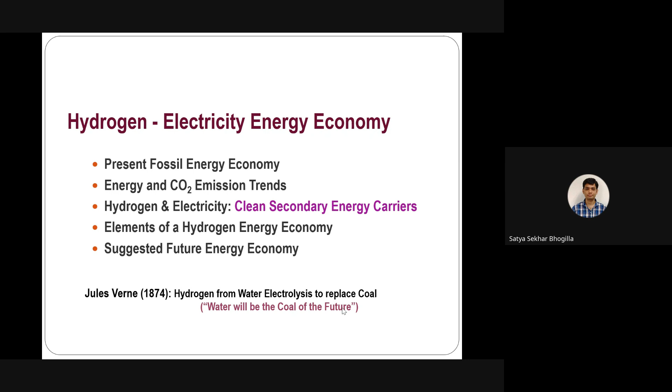As many of you know about global environment challenges - I think the previous speakers also talked about this - regarding climate change, how we want to reduce CO2 emissions. We have global agreements, COP21 and Paris 2015, to keep global warming less than 2 degrees compared to pre-industrial levels. We also have problems with air quality, like currently in Delhi we have too much air quality problem, and we want to regulate NOx emissions and restrict the number of commercial vehicles in future. The third important aspect is renewable energy development and energy security.

In the last 2 years we've seen a lot of geopolitical situations, wars between different countries, and it depends again on energy security. Some countries, because of energy problems, are unable to do what they want in terms of energy. So every country wants to be independent in terms of energy, not wanting to import or depend on other countries for energy consumption and demand. That's why we want to diversify our energy sources and improve renewable energy development in our country.

Based on this, the automotive industry is facing challenges, but it will also have opportunities for new technologies in the automotive sector as well as the power sector. So basically we want to phase out fossil fuels based on two steps: one is phase out of fossil fuel vehicles, then phase out of fossil fuel power plants. These are the two steps we want to follow to reduce CO2 emissions and go for renewable energy development.

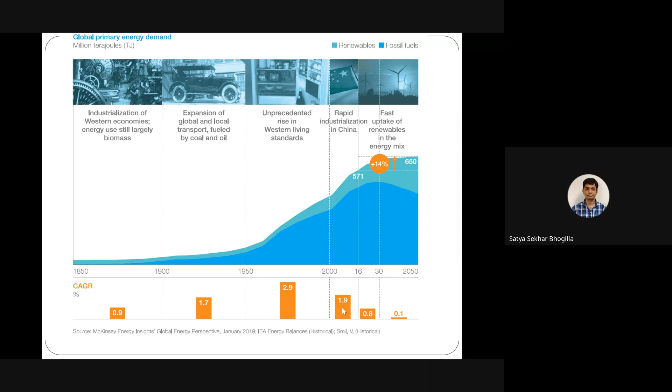We want to increase renewable energy and decrease fossil fuels. If you see, after [20]30, it was predicted that fossil fuel energy consumption will decrease, and that part will be compensated using renewable energy.

So in 2021, Prime Minister Narendra Modi ji said green hydrogen will play a significant role in achieving India's decarbonization goals. He also announced the national ambition to become a global hub for green hydrogen production and export.

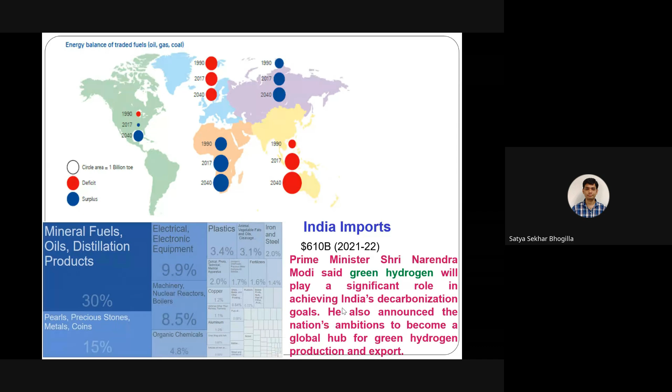So then people ask why green hydrogen is a must for India. As I said, we have energy import reduction goals - we want to reduce energy imports by moving towards renewable energy. We also have plans to increase renewable energy up to 500 gigawatt by 2030; currently we have more than 100 gigawatt. Then we want to become carbon neutral by 2070, and also move to cleaner energy, because we are the third largest CO2 emitter.

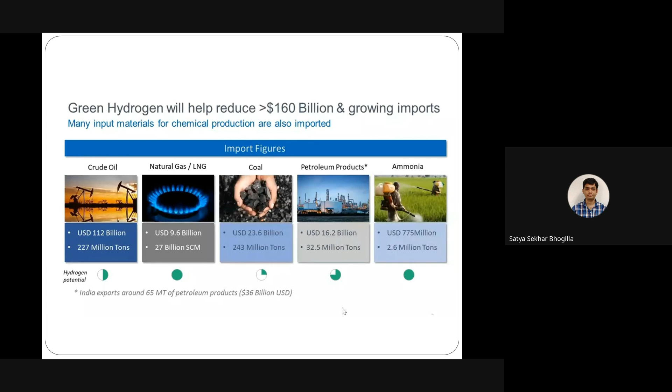Green hydrogen will also help reduce our import bills - you can reduce carbon, crude oil, and natural gas usage, since these are used for different purposes like industry or transportation. If we move from these to hydrogen and produce hydrogen within our country, then we can reduce the import figures. You can see these various figures related to different fuels.

So green hydrogen will help in the twin goals of energy security as well as decarbonization. Only 18% of total energy consumption is in the form of electricity; the remaining 82% is in other forms of energy, like heat. If we want deep decarbonization, we have to reduce that 82% of energy which depends on imported oil, coal, or gas.

If you look at the ratio of carbon atoms to hydrogen atoms, we started with wood, which is about 10 atoms of carbon to 1 atom of hydrogen. Then we moved to coal, 2 atoms of carbon to 1 atom of hydrogen. Then petroleum, 1 atom of carbon to 2 atoms of hydrogen. Now with CNG based IC engines, it's 1 atom of carbon to 4 atoms of hydrogen. If we move to pure hydrogen based transport or cars, we may have 0 atoms of carbon for 2 atoms of hydrogen. This means we are moving to reduce this carbon to hydrogen ratio, aiming to make it zero in the near future.

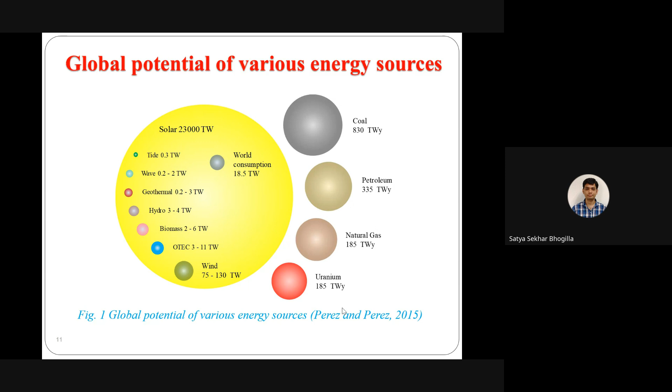This will give a major advantage to reach that 500 gigawatt renewable energy by 2030. We also have offshore wind energy. This price is coming down, but it is still higher than solar photovoltaic.

Then we have another renewable energy source, concentrated solar power. The price is coming down, but it's still 2 to 3 times higher than solar photovoltaic. This is mainly because we don't have large mass production of these components yet. But the technologies are improving. Maybe in the next session I'll talk about concentrated solar power, how to improve the technology and reduce the price in the near future.

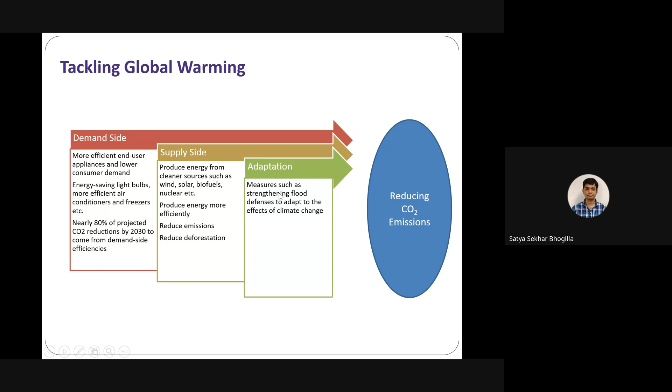So looking at the projected CO2 reduction from various sources and their contribution by 2030: the major chunk is predicted to come from mileage, meaning transportation, reducing CO2 emissions by 35% from the transport side, 13% coming from energy production efficiency, and 30% coming from lighting, ACs, and industrial motors improving efficiencies, allowing us to decrease CO2 emissions by 30%. Then a 10% improvement from large scale nuclear energy.

India has a lot of future plans, so we want to increase this 2-3% of nuclear energy to 10% by 2040 or 2050. Then 12% is coming from renewables and biofuels.

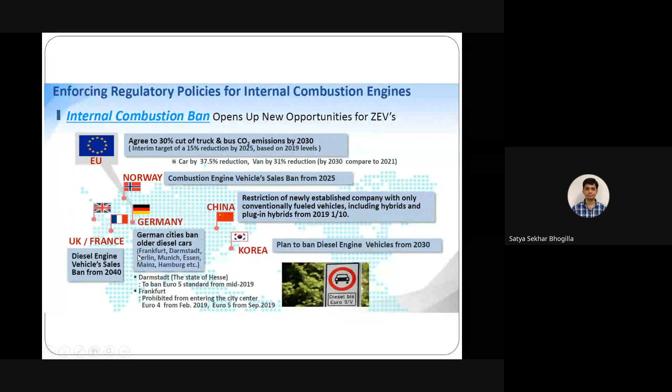Then what is the replacement of oil for the transport sector? That is the major important task. Natural gas is currently being used for some vehicles, but it's still not a long-term solution, because we are importing the natural gas, and there are still some CO2 emissions, though it's better than diesel and petrol. Then we have second generation biofuels. This will impact the food situation, because the same land can be used to produce biofuels instead of food. It also impacts the environment, because if you increase biofuel production you need more land, cutting forests, and using fertilizers and irrigation may also be a problem.

Then we have two other options. One is electrical drives using lithium-ion batteries. The other is hydrogen as a fuel, like non-fossil hydrogen, which will be one of the options. So in the future, you will see two types of vehicles, maybe after 2030: one is electrical drives using batteries, the second is hydrogen as a fuel.

So this is the green car strategy with respect to fuel economy improvement and hybridization. Currently, we are going with combustion engine plus electrification. In the future, only electrification will be there in cars, either working with hydrogen or with electricity based on batteries. So R&D is pushing towards clean mobility with respect to battery vehicles and hydrogen fuel vehicles. Now both types of cars are running on the road. You can see Tata having fuel cell vehicles, and for battery vehicles we have many different companies manufacturing currently.

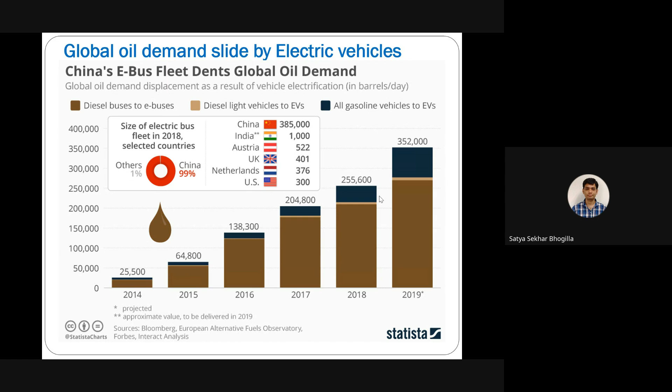Once you move towards electrical based vehicles, your energy demand with respect to fossil fuels is going to decrease. But still our demand will increase with respect to fossil fuels, because the number of vehicles is going to increase for another 10-15 years. So some percentage will come from electric vehicles, meaning the same demand or slope will not continue after maybe 10-15 years. So that will actually give the global oil demand a decrease if you increase electrical vehicles all over the world.

Then, with different technologies available, how do you choose which kind of vehicle to use? As I said, we have battery vehicles, fuel cell vehicles, conventional ICE engines, and also hybrid vehicles combining batteries and ICE engines. Then you have to think about initial cost versus operating cost, comparing ICE engines and battery vehicles.

In some states the electricity cost is very cheap, so in that case even though the cost of an EV is a little higher compared to an ICE engine, if you look long term, like 10-15 years, the total cost of initial cost plus operation cost will be much less for an EV compared to an ICE engine. That depends on your state, the cost of electricity, and related government taxes and regulations. We also have fuel cells and batteries, and combinations like hybrid vehicles.

Then we have to see how we can see the energy storage comparison, because this is important. A vehicle has to run like 1,000 kilometers or 2,000 kilometers, that depends upon your specific storage capacity. But if you compare different types of batteries, like lithium iron battery, we have storage capacity around 150.

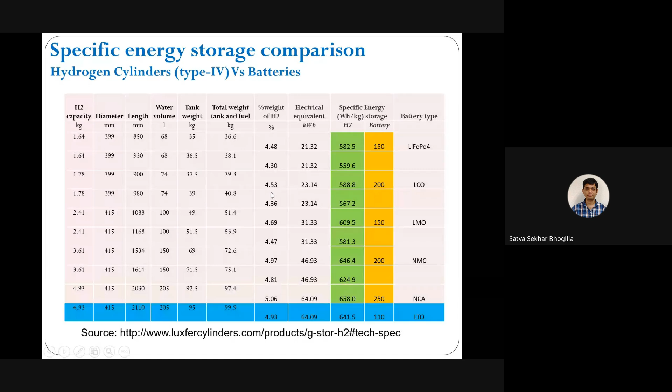If you see the different types of production technologies, like electrolysis of water and electrolysis of carbon dioxide to carbon monoxide, and we have biomass gasification, chlor alkali process, and the reformation of fossil fuels with CO2 sequestration. Then we have coal gasification to produce syngas to produce the hydrogen.

Currently we are using mostly fossil fuels. We are producing hydrogen in India as well as abroad, all over the world. But if you want to go to that green hydrogen, the energy has to come from renewable energy sources, so that we can give the production by using electrolysis of water, which will give the big jump to hydrogen production.

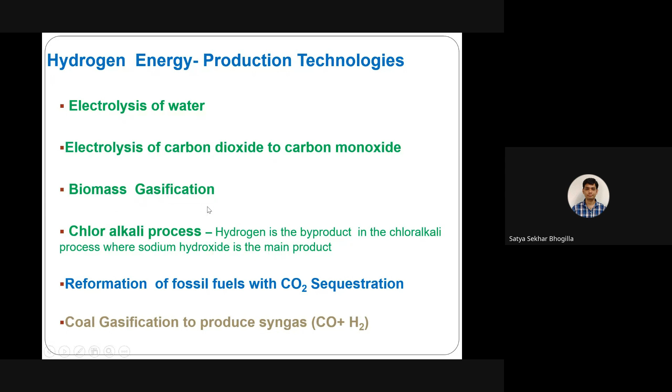At the same time, in India we also have different technologies like biomass gasification, which is also one of the future technologies that can give low pressure hydrogen production.

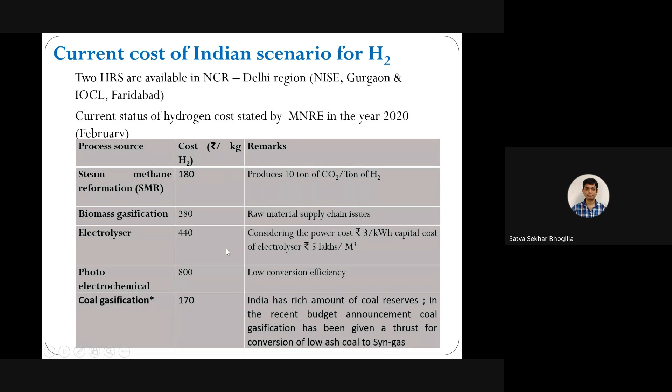Then photoelectrochemical, this is a very high cost because it has very low conversion efficiency. So this will not have future scope to produce hydrogen at low cost. Then coal gasification, the cost is very low, and India has a rich amount of coal reserves, but it will give some kind of CO2 emissions that will hamper our goal to reduce CO2 emissions.

Because we want to become a global green hydrogen hub. Then basically we want to export. If you're able to produce cheap electricity, cheap hydrogen within India by using renewable energy, this will give the driving force. If your production cost is half of this cost, then you're able to transport and export to other countries, not only using it in India. That is the major goal by 2030.

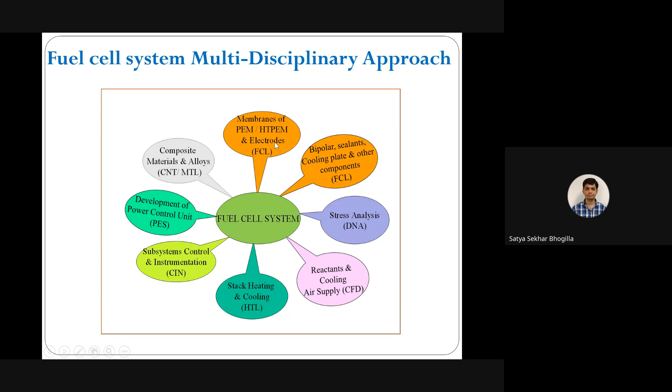We have reactants cooling and air supply, which is also related to engineering. Stress analysis related to bipolar plates and other plates, then design people come into picture. Then membranes related to electrodes - these are chemistry and chemical people and material science people who work on these different aspects of electrode chemistry. So basically what I want to say is it's a very highly multidisciplinary area, where different people can work together to produce a very high efficiency fuel cell system or electrolysis system.

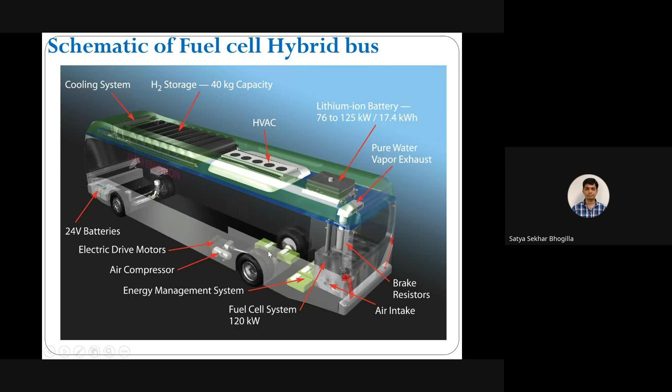Now we may have a doubt: what is the difference between the battery and fuel cell? Basically, both are electrochemical devices. The only difference is that fuel cells need a continuous flow of chemicals, whereas in a battery the chemicals are already stored inside, so they can convert into electricity. Another difference is that the fuel cell will continuously produce electricity as long as you supply the fuel, whereas a battery, if it goes dead, if it's rechargeable, you have to recharge it again, which takes some time. But the fuel cell will continuously supply electricity as long as fuel is supplied. That is the major difference between the battery and fuel cell, since both are electrochemical based devices.

Here you can see how we are converting hydrogen into electricity. Basically, this fuel cell converts the chemical energy from fuel directly into electricity, unlike an IC engine, where you first convert chemical energy into thermal, then mechanical, and mechanical into electricity if you're able to. The fuel cell converts directly from chemical to electricity. Because of this direct conversion, you get very high efficiency compared to an IC engine. There's also very low noise because there are no moving parts, compared to an IC engine. There's stable power generation, so you can continuously produce power from the fuel cell. There's reduced expensive power transmission because you can change the configuration based on your stack, connecting stacks in series or parallel depending on power requirements, and it's less polluting.

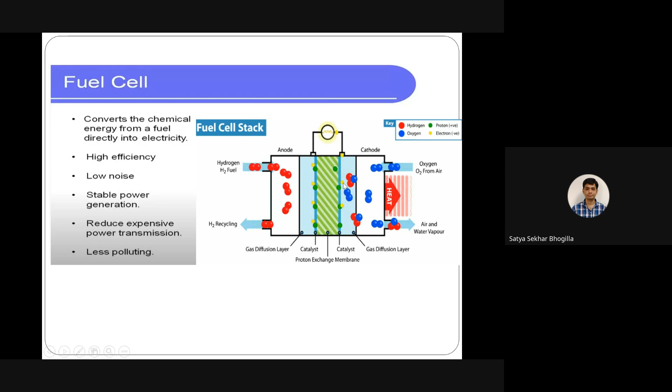This advantage will give fuel cells an edge for trucks going 1000 or 2000 miles per day. Lithium ion batteries are cheap and the technology is readily available, so if you're using your car within your city, maybe 200 kilometers, battery based vehicles are better. But for vehicles going long range, you cannot wait for recharge times of 3, 5, or 6 hours. In that case, fuel cell based vehicles are better, like for trucks, especially since you can recharge a fuel cell truck within 5 minutes compared to the battery.

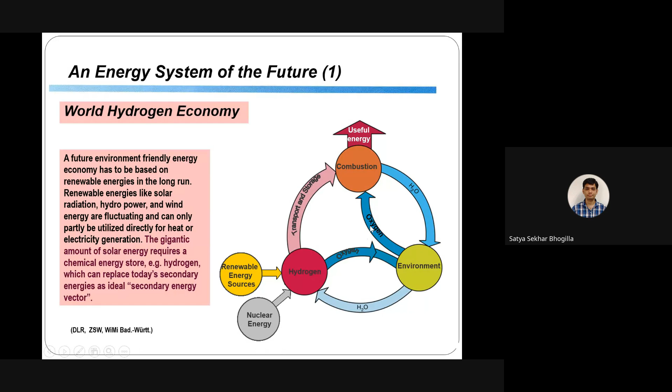So basically, you are taking water from the environment to produce hydrogen, and by producing hydrogen you release oxygen into the environment. Then, either in fossil fuels, fuel cells, or combustion, you will use the same oxygen which is delivered here to produce hydrogen. So again, you use the same hydrogen and oxygen, get the useful energy, and release water vapor back to the environment. So the cycle continues, without releasing any harmful gases to the environment. This is the future world hydrogen economy.

In that case we will use the power from the battery. So the battery will give small range power which can tackle these fluctuations in power requirement, as well as at the starting point. But when the vehicle is cruising, we will charge the battery using the fuel cells. So we need a small battery and a big fuel cell for a hydrogen based electrical vehicle, because other parts are the same as in an EV, except we have a small battery, a big fuel cell, and a hydrogen storage system in the electrical vehicle.

We have different types of fuel cells for different purposes. Here I've listed proton exchange membrane based fuel cell, which can work in the range of 80 degrees, and direct methanol fuel cell, which can also work around 80 degrees. You can give input in different forms of energy, but in PEM fuel cell you can only supply hydrogen, which converts into electricity and heat. Alkaline fuel cell works around 100 degrees centigrade, phosphoric acid works around 200 degrees centigrade, molten carbonate has an operating temperature of 650 degrees centigrade, and solid oxide fuel cell works from 700 to 1000 degrees centigrade.

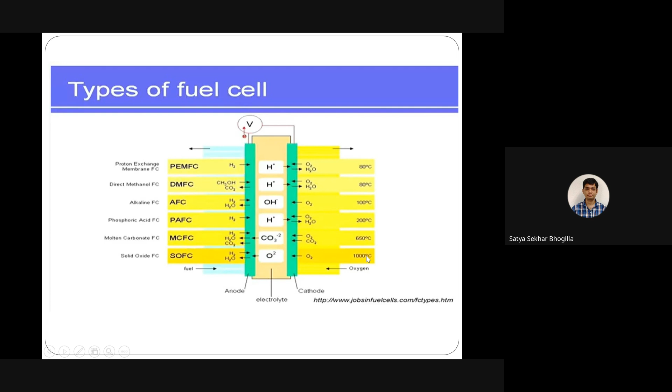So your electrolyte will be different depending upon your kind of fuel cell, as well as the anode material and the cathode material. Some fuel cells are very good for transport applications, and some are very good for stationary applications. Depending upon your application, we choose the type of fuel cell. That is very important when you're choosing the fuel cell.

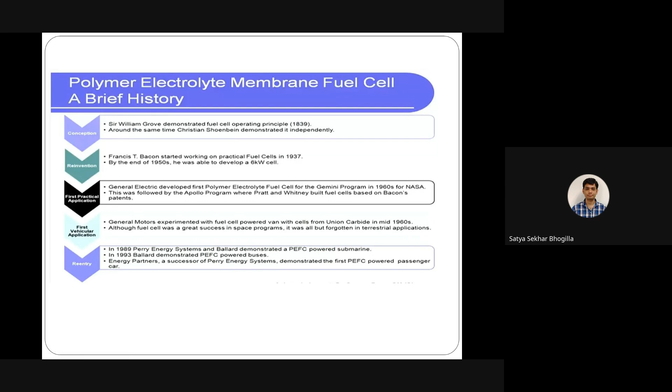We may integrate different cells regarding the requirement of voltage. Suppose you need 13 or 14 volts related to connecting to a battery, then you have to connect your cells in series to reach 14 volts. Then based on the requirement of power, you can also increase either in series mode or in parallel mode.

If you see the chemistry and thermodynamics of fuel cells, at the anode we are supplying hydrogen. This will convert by electrochemistry into protons and electrons. The electrons go to the external circuit and are converted into electricity. On the cathode side, the protons coming from the electrolyte plus electrons plus oxygen become water. So if you see the overall reaction, we are giving hydrogen and oxygen from the air, and it converts into water, generating electricity and heat.

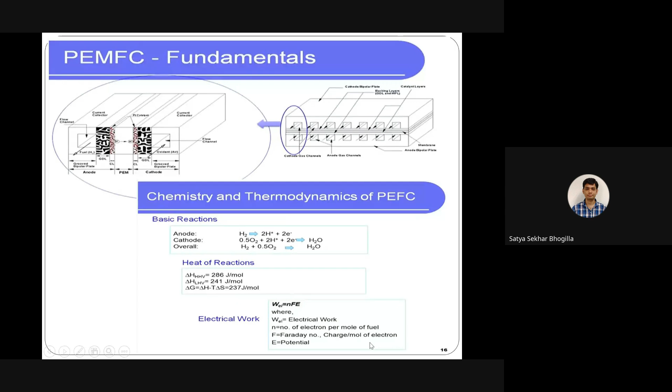This gives the electrical work coming from the fuel cell. Here N is the number of electrons per mole of fuel, F is Faraday's number, charge per mole of electron, and E is the potential from the fuel cell. Assuming that all the Gibbs free energy could be converted into electrical work - the ideal work - the maximum cell potential you get is 1.23 volts. So each cell will generate a maximum ideal voltage of 1.23 volts, but in practice we get much less, like 0.6 to 0.8 volts.

Now if you see how much energy conversion is happening in the ideal case, using the higher heating value it is 83%, whereas using the lower heating value for hydrogen it is 94%. These are ideal cases, but in practice we get efficiencies around 45 to 50 or 60 percent, depending upon the type of fuel cell.

So you can see the difference with respect to fuel cell versus IC engine efficiency. Obviously this fuel cell efficiency is very high compared to the IC engine, but you may have doubt how it can have very high efficiency compared to the Carnot efficiency. This is because the fuel cell is not a heat engine, but an electrochemical engine. Therefore the Carnot efficiency limit is not applicable here, because we are converting chemical energy into electrical energy without going through thermal energy, then thermal to mechanical, and mechanical to electrical. So the Carnot efficiency limit does not apply to the fuel cell.

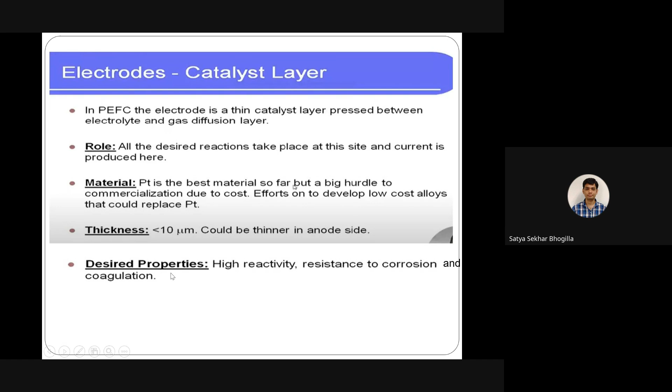Then the gas diffusion layer, which is the layer between the catalyst layer and bipolar plate. Its role is that it should be a porous layer that distributes reactants like hydrogen and oxygen to the reaction sites at the catalyst layer and removes the byproducts. Also, it has another important task: it should conduct electricity between the catalyst layer and the bipolar plate.

It should also have very high thermal conductivity to remove waste heat, because as I said, we are getting electricity, but we also have byproduct heat. That also has to be removed efficiently so that the fuel cell will not degrade or give low efficiency with respect to time.

The material we commonly use is carbon paper or carbon cloth. The thickness is a little bit thicker compared to the electrolyte membrane or catalyst layer, like 100 to 200 microns, and it may also include microporous layers. Desired properties here are high porosity to ensure gas phase diffusion, hydrophobicity to help remove liquid water from the fuel cell, and also high electrical conductivity and corrosion resistance. These are the desired properties for the gas diffusion layer in the fuel cell.

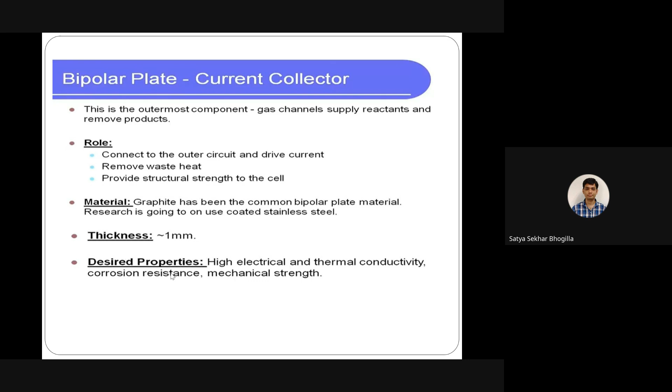The desired properties we should have are high electrical and thermal conductivity of the bipolar plate, and also corrosion resistance and mechanical strength. These are the most important properties with respect to the bipolar plate.

As I said, we should also see the water balance, because we are also producing water as a byproduct from the fuel cell. So you have to remove excess water efficiently, and at the same time the PEM based fuel cell should always be hydrated, otherwise the efficiency is going to decrease. So water balance is another research aspect in PEM based fuel cells - how to remove the excess water, and also how well you are maintaining the fuel cell in hydrated mode. That is an important aspect of the PEM based fuel cell.

So as I said, the current technology for hydrogen production is like steam reforming of natural gas. Currently we are producing 48% globally this way, partial oxidation of hydrocarbons 30%, and partial oxidation of coal again some percentage of hydrogen. Electrolysis, we are producing only 4% globally, but this number is going to change - it will increase in the next 5 to 10 years.

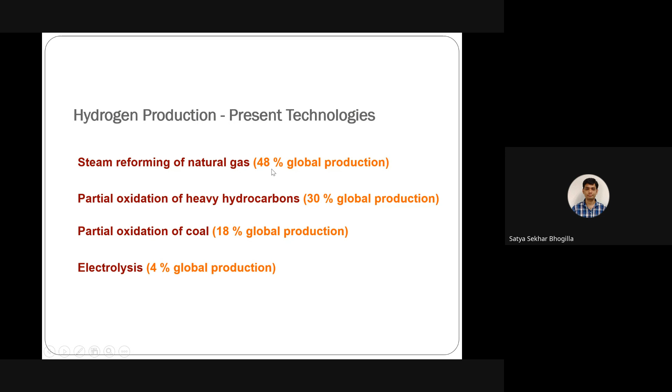Again, hydrogen produced from different sources is not the same, so let me give some examples. We call hydrogen different colors. If you use brown hydrogen, it is made from coal and CO2 is emitted to the atmosphere - we call that brown hydrogen. If you produce hydrogen using natural gas and again CO2 is emitted into the atmosphere, we call that gray hydrogen. But if you produce hydrogen from natural gas and capture the CO2 emissions during production and store it, we call that blue hydrogen. Then green hydrogen - this is the future hydrogen. If you make hydrogen production using renewable electricity with no CO2 emissions during the process, we call that green hydrogen.

So this is the future technology we can use for hydrogen production for the most part - we'll use renewable power coming from cheap electricity, and use water to produce hydrogen, and this produced hydrogen will be used later for different applications.

So 25 plus countries are planning for green hydrogen production, including India. India has a record low energy tariff which will give the driving force to generate green hydrogen, because you have very high availability and low cost cheap electricity coming from renewables. So you want to encourage this production as well as go with respect to renewable energy.

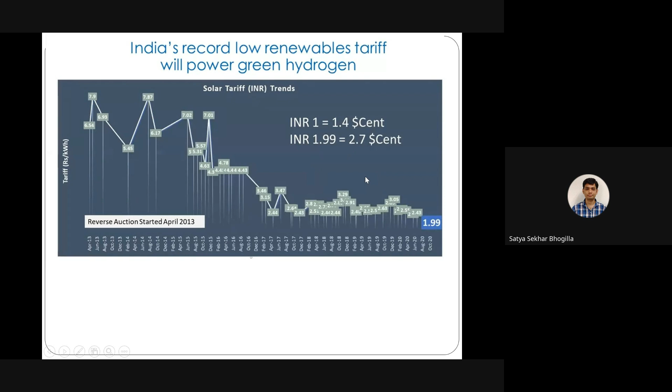You can see that India's green hydrogen goal is to have 1.5 dollars per kg, which can disturb the global energy and chemical industry. Some big companies in India also have a goal to produce 1 kg of hydrogen for $1. That will give a major disruption in global energy trade.

So you can see the predictions for 2030 of hydrogen prices by different countries. Japan will be like 2.5 USD per kg, and 2 US dollars per kg in the European Union and other countries, and in India some companies can be able to produce hydrogen at $1.5 per kg. So if you are able to produce at this 1.5 per kg, then you are going to be a net exporter, and other countries which have a very high cost of hydrogen production are going to be net importers.

So by using this renewable energy and converting it into hydrogen, you can export to other countries, so that on one side you can reduce net imports of fossil fuel, and we are going to slowly start exporting hydrogen to other countries like Japan and others. This will make your import cost go down, and also your exports will increase. This is the major important aspect of the green hydrogen mission in India.

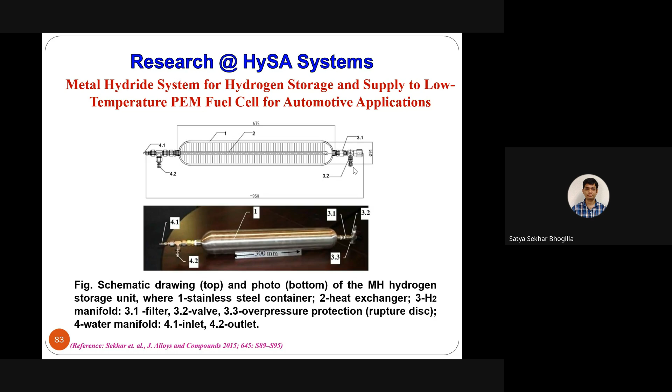Here I want to show what I have done in HySA Systems, where we used the metal hydride system for hydrogen storage and supply to a low temperature fuel cell for automotive applications. I want to show here that we have developed a golf cart, converted this battery-based golf cart to a fuel cell-based golf cart.

Initially, as I said, the fuel cell will generate electricity, but there may be some byproduct heat, which has to be removed efficiently to produce electricity efficiently. So that waste heat is used to release the hydrogen from this container. Basically, hydrogen supply from metal hydride is an endothermic reaction, so you need heat to release the hydrogen. That heat we are taking directly from the fuel cell, which is generating it by producing electricity. So we are able to use the waste heat coming from the fuel cell and give it to the metal hydride container, so that it can produce hydrogen to supply to the fuel cell. In this way, we are using the waste heat coming from the fuel cell to drive the hydrogen desorption process.

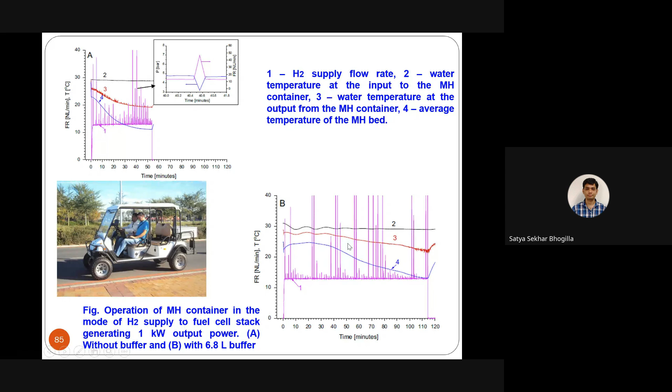The main reason is that if you take the entire hydrogen from the metal hydride, it is not able to desorb the hydrogen, because it's an endothermic reaction. The temperature goes down, which means the pressure also comes down. So the supply pressure of the storage tank does not meet the requirement of the fuel cell, so you are not able to supply the hydrogen requirement, and your fuel cell stops. Whereas here, because we are taking from both cylinders, the supply from the metal hydride is very low compared to the compressed gas, so the temperature and pressure stay high enough to meet the fuel cell requirements, and you can run the vehicle almost 2 hours.

We have also developed this hydride based compressor. If you use compressed hydrogen storage, you have to compress to either 350 bar or 700 bar, like type 3 hydrogen storage composite cylinders which can hold up to 350 bar, whereas type 4 cylinders go up to 700 or 750 bar. For this, we should use mechanical compressors to compress the hydrogen, but mechanical compressors use electricity, which is high grade energy again.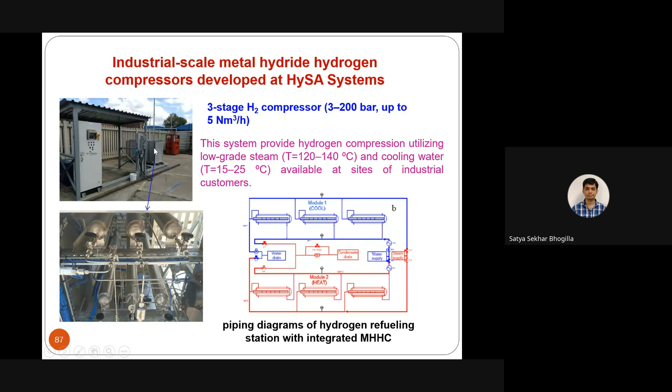So we have developed a three-stage hydrogen compressor where we are able to use waste heat coming from industry to drive the compressor. We compress hydrogen using low grade steam at 120-140 degrees centigrade and cooling water at 15-25 degrees, which is available at industrial customers, so you don't need to use high grade electricity to compress hydrogen. This technology has been handed to the company that funded this project.

In this hydrogen compressor, we used three different kinds of alloys to compress hydrogen from different pressures. Suppose the inlet pressure is 3 bar, then in the first stage we compress to 20 bar, then from 20 to 50 bar in the second stage, and 50 to 200 bar in the third stage. So we finally compress from 3 bar to 200 bar using different alloys which can absorb and desorb hydrogen at different temperatures and pressures. You can see the cycles of hydrogen compression, how we achieve compression at different stages.

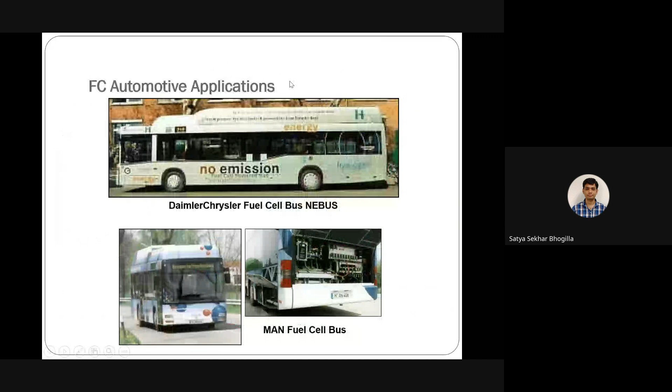These are different storage applications used previously with metal hydrides. This is an automotive bus using fuel cells.

I want to show another project we did with AIST Japan. There again, as I said, you get renewable energy supply, but it's intermittent in nature - solar you get only in daytime, and wind also has fluctuations. Suppose demand and supply don't match, then you need an energy storage system.

You can use batteries for small scale, but for large scale energy storage, battery cost is very high. In that case we can use an electrolyzer, fuel cell, and hydrogen storage tank to convert the excess supply from the grid. When you don't have demand, that electricity can be used in the electrolyzer to convert into hydrogen and store it. During peak hours, when supply from the grid is low and demand is high, you can convert the stored hydrogen back to electricity using the fuel cell, so you can match supply and demand using this energy storage system.

Another aspect is, if you want to use this hydrogen for hydrogen vehicles, you can supply the stored hydrogen to refilling stations, which refill the vehicles. So you can tackle the grid problem as well as the hydrogen fuel need for the transport sector. By using this kind of system, we can store renewable energy, which is intermittent in nature, and supply electric power, hydrogen, and thermal energy.

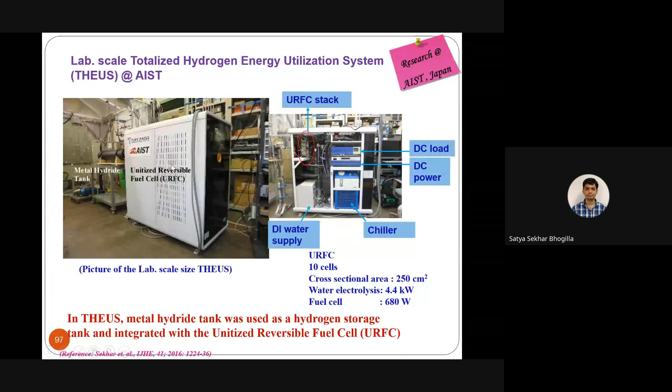This is the principle of the unitized reversible fuel cell. It can work in electrolyzer mode, and you can reverse it to work in fuel cell mode. So the cathode becomes the anode in fuel cell mode, whereas the anode in electrolyzer mode becomes the cathode.

So these are the different parts of the fuel cell and different materials we have used here. As I said, for the membrane, most fuel cells use Nafion membranes. Here we use Nafion 115, and the catalyst is platinum, and on the oxygen side it's platinum plus iridium.

As I said, the cost of platinum is very high, so some research is going on to reduce the platinum content in the catalyst layer. The gas diffusion layer, from the hydrogen side, is carbon paper, whereas on the oxygen side it's titanium felt. Again, the bipolar plate, which is the thickest part of the fuel cell, is made of titanium. The active area of the fuel cell is 250 centimeter square, and the number of cells is again 10.

You can see the various parts of the system, because in a fuel cell or electrolyzer, the stack is small, but you have other components required for the balance of plant, which is very important in terms of engineering aspects. So apart from the stack, you should also design the system and the balance of plant components such that you get very high efficiency at the system level.

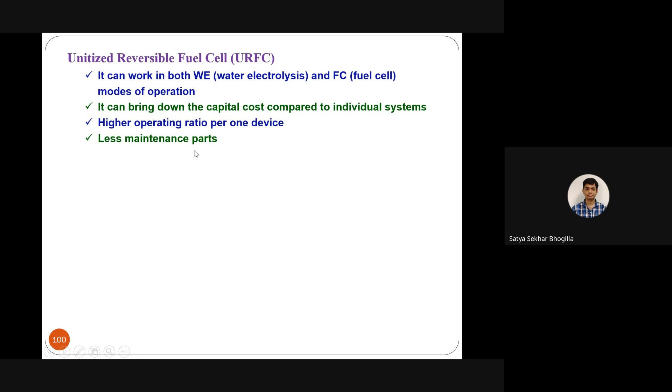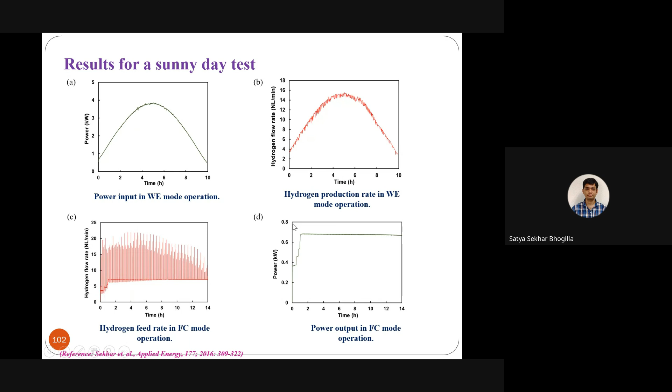Later, since you will not get power from the solar PV, you have to generate electricity through fuel cells. We supplied the hydrogen to the fuel cell mode, and the power is generated from the fuel cell using the same system. So this is during night time and this is daytime: power is supplied to the electrolyzer to produce hydrogen, and the same hydrogen is used at night to produce electricity again. This is a kind of renewable energy storage system.

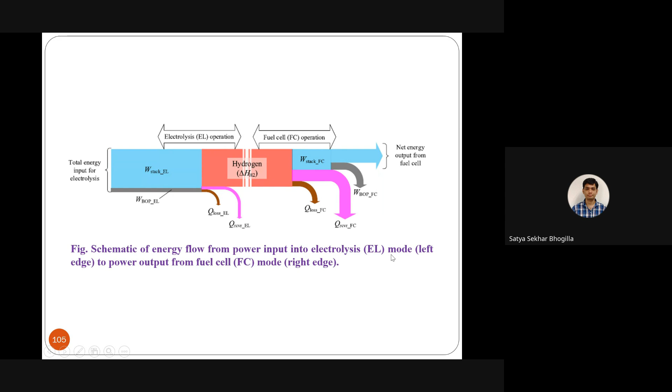This is again the result for the MH storage tank, with some performance parameters. This shows how we see the energy flow in terms of input to the electrolyzer and storage, and the output converting again from the fuel cell. So this is how energy flows from power input to the electrolysis part and storage part, and again in fuel cell mode. We also tested for a cloudy day test.

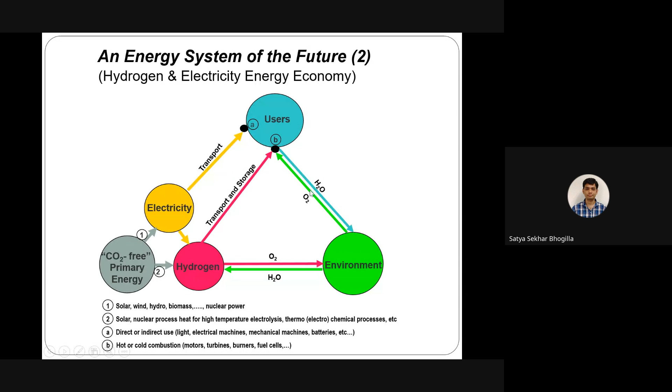So this is the future scope of the energy system. You'll use both electricity for transport and hydrogen, and the environment is very clean because you will not produce any CO2 emissions.

Some examples of hydrogen vehicles. And yeah, the challenges. Thank you.

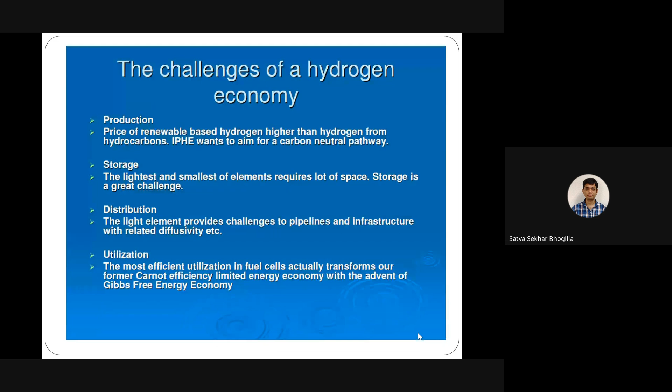You may go for PEM based electrolyzer, or you can go for alkaline based electrolyzer.

Can I start sir? Yes sir, yes please sir. We can have the remaining questions after this session sir. Yes sir, yes sure, yeah.

So in this session, I'm going to concentrate more on the metal hydride systems for various applications. This I already explained.

Now, as I said, we have a grid problem related to supply and demand because of the increase. Currently we have around 440-450 gigawatts of total capacity in the grid. That 450 is going to increase again by 400 gigawatts from renewable energy by 2030. It means you are going to have more than 50% renewable energy in the grid. So you understand how this intermittent renewable energy source will impact grid stability.

That is very, very important. Sometimes you may have heard about grid failure in the national grid, leading to an entire power cut for most states. This also creates a major hurdle to manage the grid without any failure. So we need some kind of storage technologies to store the excess energy and give it back whenever the grid has a lot of demand.

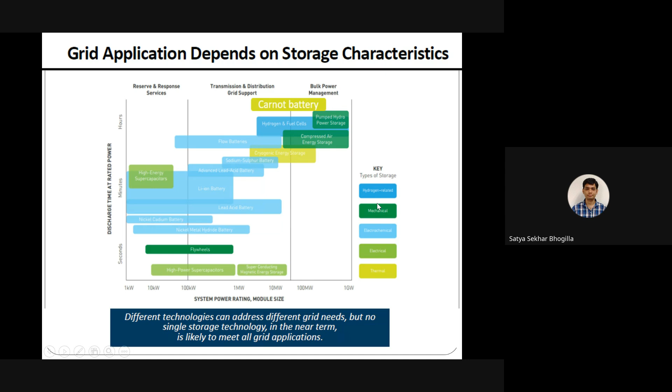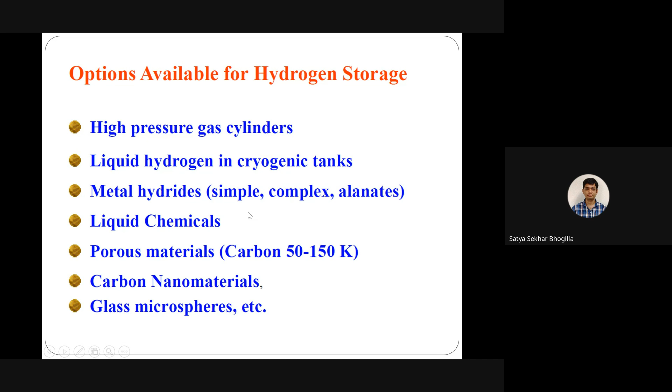So I think I have explained this. What are the available options for hydrogen storage? We have major storage technologies: one is high pressure gas cylinders, then liquid hydrogen in cryogenic tanks, and the third is solid state hydrogen storage using porous materials and carbon nanomaterials.

I'll explain each one. Coming to high pressure gas cylinders, as you know hydrogen density is low, so you need a large volume to store hydrogen. But if you compress the hydrogen, the density improves, so you can store a large amount of hydrogen within a small volume.

Currently we are using high pressure gas cylinders from 200 bar to 800 bar. Type 3 cylinders, composite cylinders, can go up to 350 bar. Type 4 can go up to 700-800 bar hydrogen storage. So that is the major advantage: you can reduce the volume by compressing the hydrogen.

But again, the gravimetric density will still be low compared to other technologies. Then you may feel it's unsafe because you have a 700 bar storage cylinder in your car, which gives some psychological feeling that something is unsafe.

But the major drawback of this storage is compression. Obviously you have to provide some energy. If you use a mechanical compressor, you have to use electrical energy to compress from like 2 bar to 800 bar. If you see the energy content requirement of compressing from 2 bar to 800 bar, 80% of the content energy is required to compress from 200 to 800 bar.

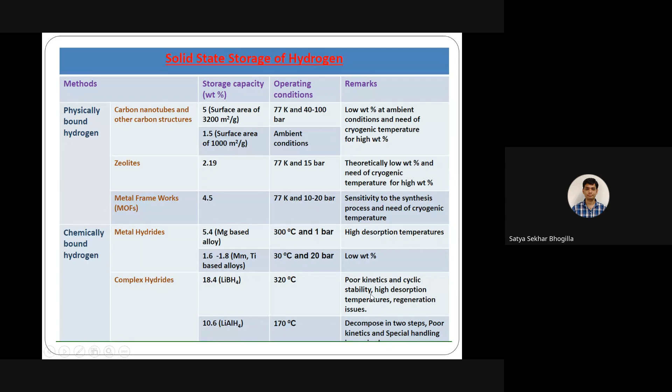The complex hydrides again have very high weight percentage storage capacity, but the operating conditions require 320 degrees centigrade temperature, poor kinetics, and also problems with cycle stability like absorption, desorption at the same weight percentage, and high desorption temperatures, and regeneration issues also will be there.

So, I think in my previous session I explained how we are using metal hydrides. Basically these are intermetallic compounds formed by alloying different metals by ball milling or melting. So here the hydrogen absorption process is exothermic, meaning you supply hydrogen to the metal hydride, it becomes an intermetallic compound, it becomes metal hydride, and it releases heat. That's called an exothermic reaction. So your exothermic range is 15 to 75 kilojoules per mole, depending upon what kind of alloy you are using for hydrogen absorption.

Again, in desorption, it is like endothermic. So if you want to dissolve hydrogen from the metal hydride, you have to supply heat to the metal hydride. Then only you are able to dissolve hydrogen from your metal hydride intermetallic alloys. So basically these two are like heat-driven mass transfer phenomena. Without supplying heat, you cannot dissolve hydrogen. Without removing heat, you cannot absorb hydrogen.

So you can play with this heat transfer, and you can control the desorption rate and absorption rate with respect to your heat transfer. So this is a very good research problem related to hydrogen desorption and absorption, by playing with the heat interaction with respect to the tank and the fluid.

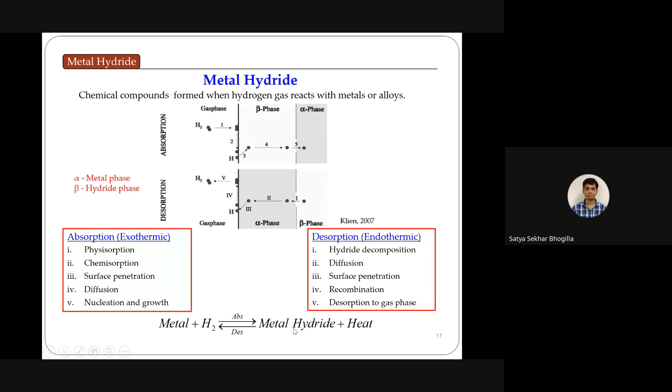Then in desorption, it is again reversed. You will have hydride decomposition, then diffusion, then surface penetration, then recombination of the two atoms into a molecule, then desorption to the gas phase, like this. So absorption process and desorption process are entirely opposite. You have a metal, and if you supply hydrogen, it will absorb and become metal hydride, and the byproduct is heat. In the desorption process, if you want to dissolve hydrogen from metal hydride, you supply heat to the metal hydride, then it will release the hydrogen, and only the metal remains inside.

Hydrogen storage by metal hydrides can store hydrogen at room temperature and atmospheric pressure. This is a very important point for stationary applications. High storage capacities and ability to absorb and release large amounts of hydrogen many times without any deterioration. People have tested this up to 10,000 cycles.

Absorption and release rates can be easily controlled by adjusting temperature and pressure. By using heat and mass transfer phenomena, you can control the absorption rate as well as desorption rate by adjusting supply pressure. It is environment friendly, utilizes low grade thermal inputs for desorption, is compact, and consists of no moving parts for various applications.

It's also a safe storage media, particularly for mobile applications, because even if you have a leak, without heat it will not release hydrogen from the metal hydride. So from a safety standpoint, it is also a very good option. It can be effectively used for more than 15,000 cycles without any reduction in storage capacity.

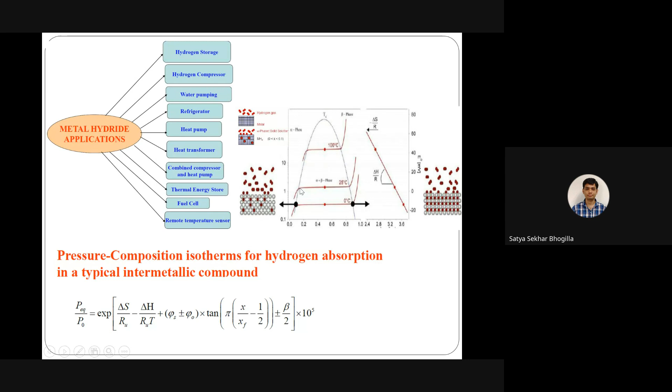Again, this depends upon pressure and temperature, so you can play with different pressures and different temperatures to absorb and desorb hydrogen. Based on this PCT diagram, pressure composition temperature diagram, we can make different kinds of applications of metal hydrides, like hydrogen storage, compressor, refrigerator, heat pump, heat transformer, thermal storage, and fuel cell applications.

Here you can see this: by using this formula, you can play with pressure, enthalpy, and temperature, so you can able to get different pressures.

These are the metal hydride based energy conversion systems. Basically these are environment friendly, utilize low grade energy as input and output, and are compact in construction. There are no moving parts, only hydrogen absorption and desorption will occur. There is vibration-free and noiseless operation. They offer a wide range of operating conditions depending on your PCT characteristics, and since there's no liquid circuit, they can be operated in any orientation.

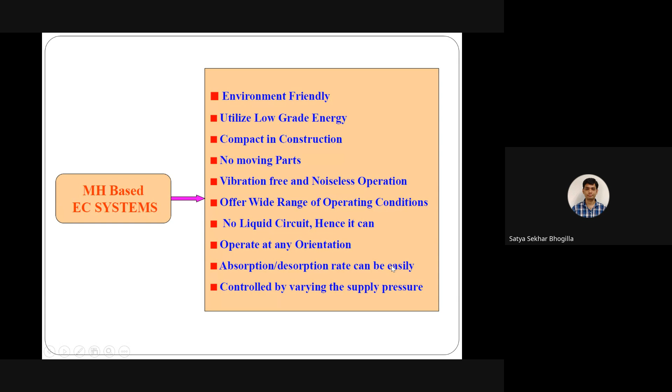Also, absorption rate and desorption rate can be easily controlled by using heat transfer, controlled by varying supply pressure.

So we have discussed the hydrogen heating value of different fuels. Hydrogen has a high calorific value compared to other fuels like petrol or diesel. Now I'm going to talk about this metal hydride based thermal storage system.

In solar PV you get electricity as the output, but there are other renewable systems, like solar thermal systems. There, suppose you want to generate power during peak hours using a solar thermal power plant, then you should have some kind of storage system which can store energy during daytime. Then the same stored energy can be used to generate electricity during peak hours. This is a very good case.

For example, in India, some states like Delhi, or in European Union countries, they have different tariffs: daytime tariff is different, and peak hours or night tariff is different. In that case, solar thermal application with storage is also a major advantage compared to solar PV plus battery, because in terms of cost comparison, you can generate thermal energy during daytime using solar thermal collectors, store that energy in the storage system, and then use that stored energy for generating power during peak hours, giving an added advantage.

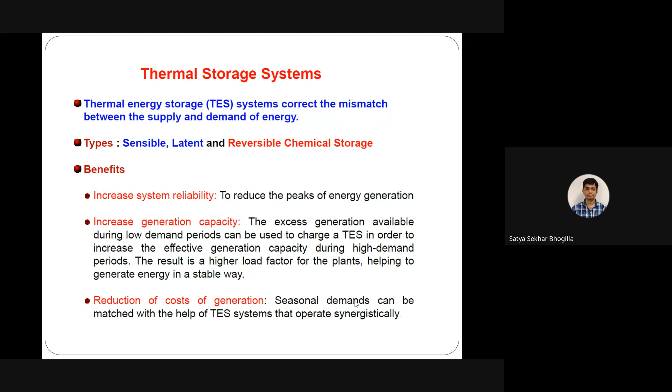Reduction of costs of generation is another benefit. Using seasonal demands, in summer you may have a lot of solar power, but in the rainy season you may not have very high solar energy. So if you're able to store the energy during summer time, May or June, you can produce that stored energy during the rainy season when you don't have good solar power, giving a reduction of costs in power generation.

We have different technologies for thermal storage media. Many people know sensible heat storage in terms of liquid and solid, like molten salt, which is a very mature liquid storage media. Currently, in solar thermal power plants, some people still use concrete or cast steel for very high temperatures, like 1000 degrees centigrade, to store energy. But the volume of energy storage needed will be very high, and the cost will also be very high.

Other people use latent heat storage with phase change materials like hydrated salts and paraffins, but the cost of energy storage there is also a little bit high. We also have to consider cycle stability, to see how many cycles we can get with very good storage capacity.

The recent one is thermochemical heat storage. This is getting very good focus in recent research, because you're able to store energy at very high temperatures. There are different materials available, and I'm focusing on metal hydrides, to see how we can use thermochemical storage to store thermal energy at different temperatures.

The advantage of metal hydrides is high thermal storage energy density compared to other thermal storage methods. That means for 1 kg of material, or one unit volume, compared with other storage materials, we can store very high energy density compared to sensible heat or latent heat storage. That is a very important aspect of metal hydrides as a thermal storage system.

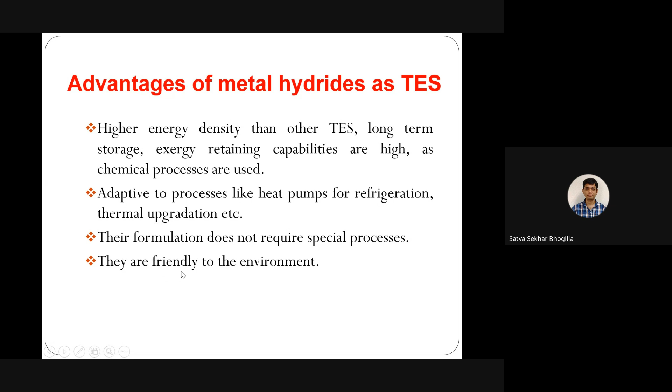They are adapted to processes like heat pumps for refrigeration and thermal upgradation, and don't require any special purpose equipment. They are also very friendly to the environment, because we don't get any harmful byproduct gases.

We tested this metal hydride based heat storage device using a magnesium alloy, magnesium plus 30% of MnF5 and other material. We stored heat at 714 kilojoules per kg of material used. The energy storage efficiency is 0.743, meaning around 70% efficiency with this kind of material, and the exergy efficiency is almost around 60%.

Here you can see how we tested with respect to different pressures, how much heat was stored using this alloy. You supply at 30 bar, and it releases the heat. If you remove that heat using a fluid, you can measure the inlet and outlet temperature of the reactor and the mass flow rate. Calculating with MCP delta T, you can determine how much heat is stored by the reactor. Again, you can supply the same hydrogen to the reactor and get back the same amount of heat. That is the added advantage of using this kind of alloy.

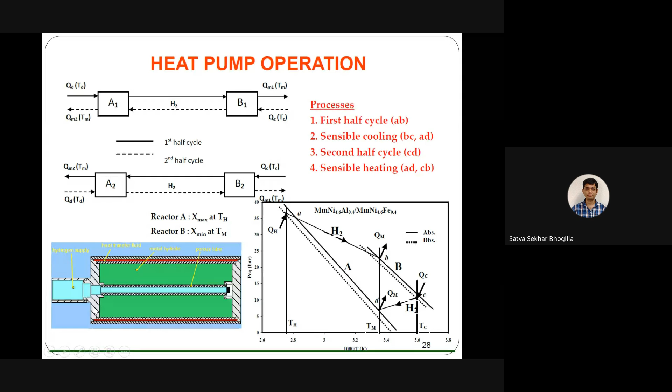We use a filter because the metal hydride particles are very small in size, so when it's desorbing hydrogen, some particles come along with the hydrogen. To stop this during desorption, using this filter you can stop the metal hydride from going along with the hydrogen, so that the metal hydride always stays inside the reactor. That is the advantage of using a metal hydride porous tube as a filter.

Another application is using solar energy to drive this heat pump. Suppose you use a parabolic trough collector — many people know we can generate heat using a parabolic trough collector from medium to high temperature, like 400 to 450 degrees centigrade. That can be used as a driving source for the heat pump, so you supply heat at 150 to 170 degrees.

This goes in a cyclic way, so you give input at high temperature, 150 to 170, and you get low heat maybe minus 15 or 0 degrees, depending upon your alloy. So you have to make tailor-made alloys. By using two alloys, you can make one heat pump based on metal hydride and hydrogen technology, using either solar energy or waste heat from industry. This is one application of metal hydride technology.

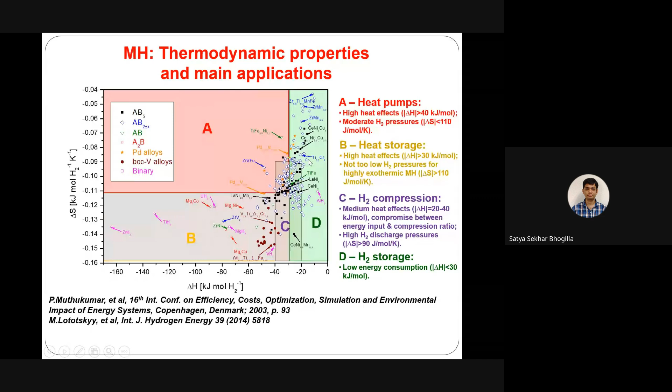The metal hydride storage should be safe with easy operation, and should have high H2 volume density and low quantity of consumed energy. For different applications like heat pumps and compressors, you can use high temperature metal hydrides or low temperature metal hydrides.

Promising applications are stationary and portable hydrogen storage units for PEM fuel cell applications for backup power, hydrogen storage and supply systems for laboratories and special technology processes, and special mobile applications like forklifts and golf carts, which can use this kind of storage technology.

You can also see underwater autonomous vehicles using this kind of storage system, because there you don't have a weight penalty - you actually need some weight to provide buoyancy in underwater vehicles.

But the main issue is poor dynamics because of heat transfer limitations, since metal hydride thermal conductivity is very low. That is where you need engineering to improve the heat and mass transfer rates in terms of reactor design.

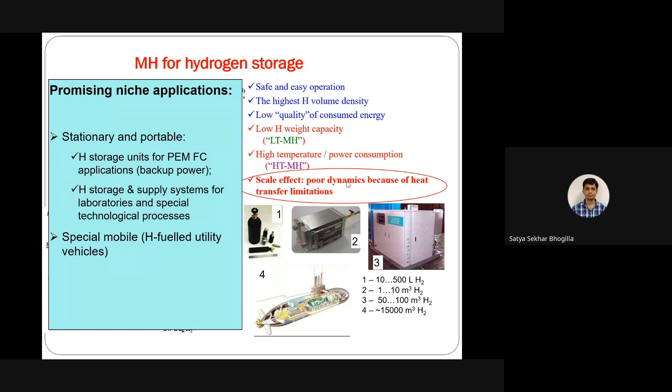As I said, one of the applications is the compressor. By using different ways of temperature inlet and outlet, you are able to control the pressures.

Suppose you want to absorb the hydrogen, then your metal hydride should absorb at low temperature. Once you have absorbed the hydrogen at low temperature, you heat up this reactor, suppose to 150 degrees centigrade. Because of this temperature change, the PCT, the pressure will increase, so that you will desorb the hydrogen at very high pressure.

You are absorbing at low pressure and desorbing at very high pressure. If you make this kind of system in different stages, you can desorb hydrogen at very high pressure, like 200 to 400 bar, using waste heat from 150 degrees centigrade. It means you are using low grade heat and compressing hydrogen from low pressure to very high pressure, instead of mechanical compression.

This is the system people have designed, the metal hydride compressor using different alloys. This will be safe and easy to operate, because mechanical compressors have moving parts. Suppose if some spark is generated during that movement, hydrogen needs very low energy to fire, so it will easily ignite. In this case there are no moving parts, so it's very easy and safe operation.

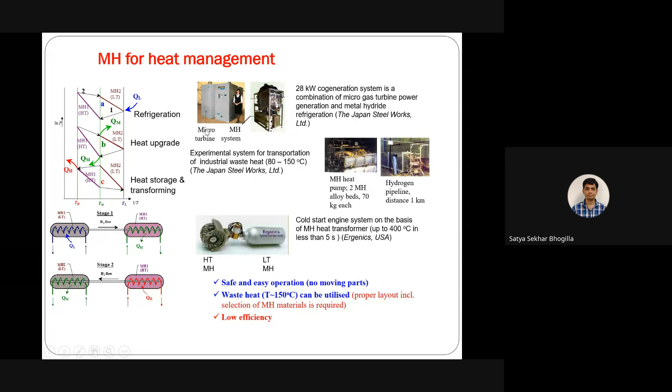This is how you manage the metal hydride system for heat management for various applications, like refrigeration mode, heat upgrade mode, and heat storage mode.

As I said, there is a problem with these metal hydride based thermal machines. One is thermal management issues, because the thermal conductivity is very low. So if you want to remove the waste heat during the absorption process, you cannot easily do it because your thermal conductivity is low, and in that case your heat transfer rate is also low.

Once you are not able to remove the heat generated during absorption, the temperature of the metal hydride will increase, meaning your pressure will also increase. This means your supply pressure becomes less than the metal hydride pressure, so it will not absorb, meaning it will stop the absorption process. If you are not able to remove the heat at a fast enough rate, your absorption kinetics will decrease.

Same with desorption, because in desorption you have to provide heat from outside to the metal hydride, it's an endothermic reaction. If you are not able to supply heat at the required heating rate, it will stop the desorption process, like we have seen in the previous session with the golf cart. So you should have some kind of tailor-made solution for how to improve the thermal conductivity of the system, so that you can manage the heat transfer rate along with your hydrogen absorption and desorption.

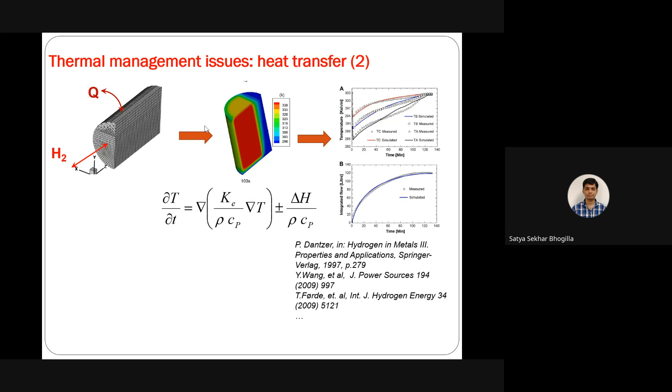So here we have done some thermal management and heat transfer studies on how to increase this thermal conductivity, and we have tested and studied various temperatures and pressures to see how the hydrogen heat transfer rates are related.

This again comes back to your heat transfer rate. If you are able to increase the heat transfer rate, then you can increase the productivity, the compression rate, so that it will more closely match your mechanical compressor efficiency.

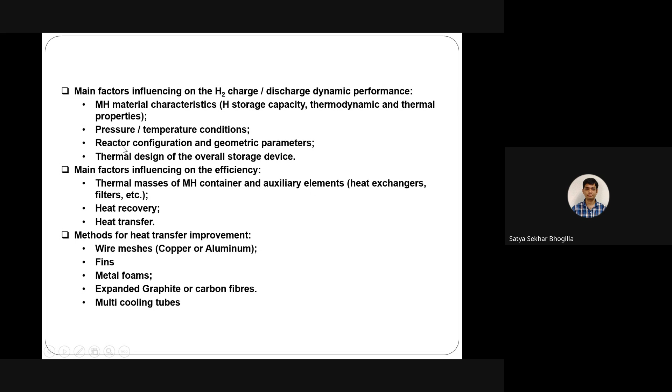So these are the main factors influencing hydrogen charge or discharge based on storage capacity, thermodynamic and thermal properties, pressure and temperature conditions, and reactor configuration and geometry. This is very important from a mechanical point of view for thermal design of the overall storage device. This is also a very good research topic. I think many people have done novel designs to overcome this low thermal conductivity.

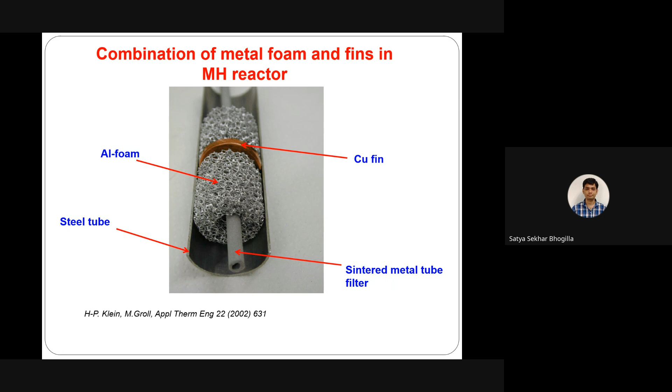You can also see a combination of metal foams and fins in the reactor to improve the thermal conductivity inside the reactor, so that the effective thermal conductivity can be improved, from 0.5 to like 2, 3, or 4, increasing heat transfer rates. Another method is to compress and add natural graphite to improve thermal conductivity by compressing the metals, achieving very high thermal conductivity from 0.5 to 8 watts per meter Kelvin. This increases the heat transfer rate and also achieves very good kinetics of absorption and desorption.

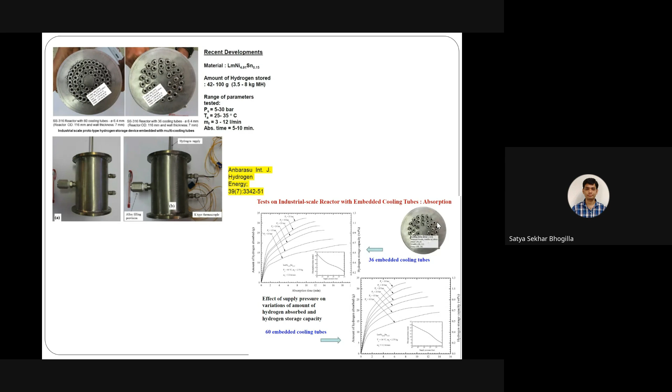So these are the different reactors we made to increase the reaction kinetics and improve heat transfer effectiveness, varying with respect to different temperatures and pressures. This is another kind of metal hydride containment to improve the heat transfer rate, giving a large surface area to increase the heat transfer rate.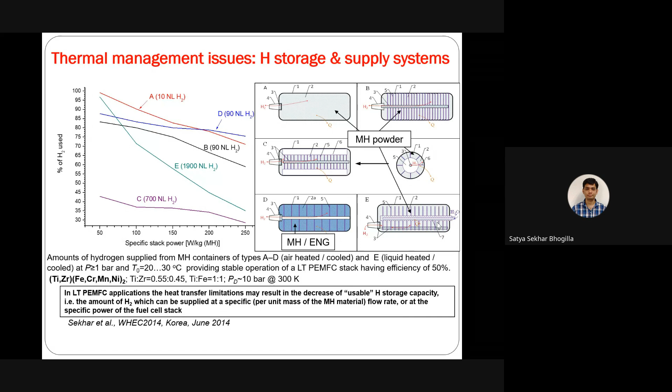Again, these are different designs to improve thermal management issues in hydrogen storage systems. I explained this in the previous session, where we use the metal hydride storage tank here, which supplies the fuel cell. So here again we are using fins to improve the thermal conductivity of the metal hydride storage tank.

So the conclusions from these studies: heat transfer is a major factor directly controlling H2 absorption and desorption rate in metal hydride beds, and influences the efficiency of conversion. Because if you want to increase the product rate, you should increase the heat transfer characteristics of the reactor; that is very important. You should also pay special attention to the optimization of reactors.

So you should not only increase the heat transfer rate, but also not increase the thermal capacity of the system, the CP, MCP. Maybe on one side you improve the heat transfer rate, but on the other side if you increase the CP, you still need a large amount of heat to supply during absorption and desorption phases. So you have to optimize both the improvement of heat transfer rate and the thermal capacity of the tank. That is a very important aspect when designing.

This is also a research area people can focus on, how to optimize the reactor size with respect to the kinetics of hydrogen. People also use expanded natural graphite to improve the thermal conductivity within the system. And some people mitigate this problem using hybrid systems, combining both the metal hydride system and compressed gas system.

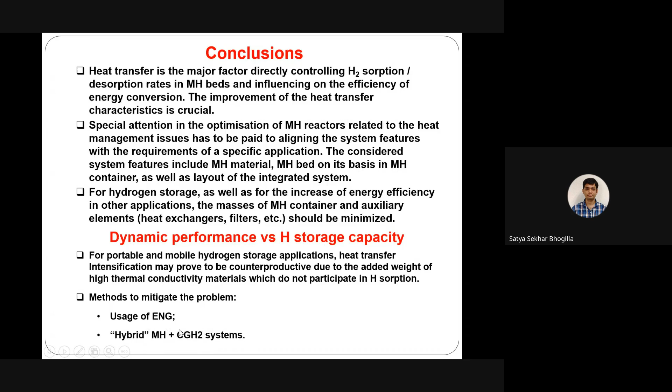We have a collaboration with National Sun Yat-sen University of Taiwan, where we are studying with respect to PEM fuel cell and metal hydride storage system, how we can store renewable energy by using the trigeneration plant.

As I said in the previous session, we have waste heat at 80 degrees that can be used in an organic Rankine cycle. Again, you can get some electricity from the organic Rankine cycle. This gives additional power input from the waste heat coming from the PEM fuel cell. Again, the waste heat can be given to a vapor absorption system, so that you can also get a cooling effect as a byproduct coming from the waste heat using the PEM fuel cell.

By using this trigen system, you are able to get electricity as well as heating and cooling. Basically we call it combined heating and cooling and power system, CCHP system.

Again, as I said, by using different technologies, we can also store thermal energy. Thermochemical is still in R&D stage, while molten salt and others are in demonstration stage. The advantage of thermochemical is that you can get a very high temperature heat output.

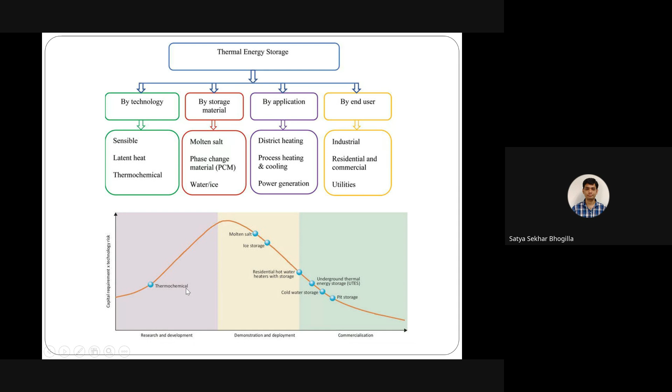I am showing another project we have with Japan, with other international collaborators like KTH Sweden as part of this project. This is an international joint research project related to high temperature thermal storage technology, which we call the Carnot battery.

Suppose your renewable energy supply is more than needed, then you convert this power into heat using either an electrical heater or heat pump. Then you store this heat in terms of a chemical heat pump or latent heat storage. Again, you convert heat back to power.

This is not an efficient way, but people still use this kind of system if you have very low cost of electricity coming down, and it can be integrated or retrofitted with respect to current coal-based thermal power plants, because the stored energy is again used in the old power plant. So you are using the same infrastructure for storing renewable energy, and again getting back power from the power plant.

So this is another example of this Carnot battery. Discharge efficiency is again limited by Carnot efficiency in this case, and you are able to store the electricity. Here, I'm showing the retrofit of a coal-based power plant.

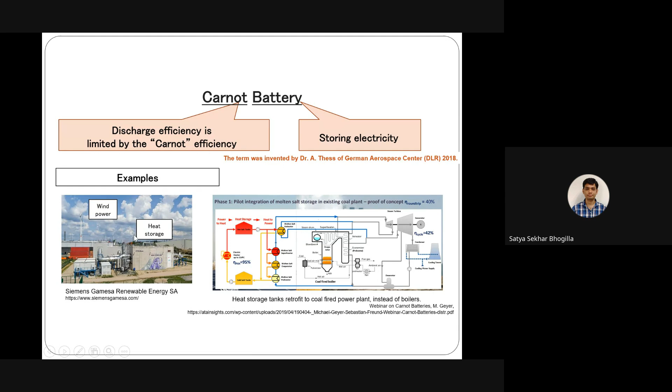Again, the key technology for the Carnot battery is how efficiently you store the energy. That is also an important parameter when you are choosing different kinds of materials. You can see that materials like salt can store energy densities up to around 500.

But there are new materials which can store much higher energy density, such as PCM based materials, and thermochemical storage using hydrogen and titanium, where you can get about 10 megajoules per liter of storage capacity. The temperatures you can achieve are around 600 to 700 degrees.

As a mechanical engineer would know, if your storage capacity temperature is very high, then your conversion efficiency will also be high. Looking at the Carnot efficiency, if your heat source temperature is high, your conversion efficiency is high. So if you have a very high temperature storage technology, your conversion efficiency will also improve.

Here we have two technologies working within this international project. One is a microencapsulated phase change material, which can store heat up to 600 degrees. Here you can see an aluminum silicon alloy, which is used to store heat in terms of phase change.

The other one we are working on is thermochemical storage, utilizing a reversible reaction with titanium. This will give 125 kilojoules per mole of hydrogen. But what's important is the temperature—you can get 600 to 700 degrees centigrade, which is not currently possible with this salt-based heat storage media.

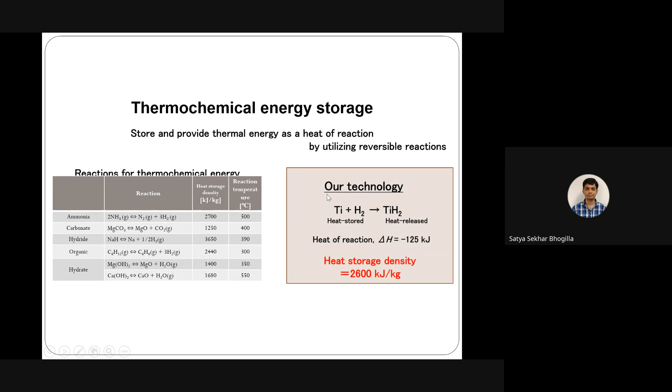Again, the same, you have absorption desorption, and you can play with respect to temperatures and pressures, so that you can utilize the stored energy when you don't have much electricity from renewable sources.

Either you can use the pressure difference for moving hydrogen from one reactor to another, or you can use some kind of compressor or pump to move hydrogen from one to the other. So depending on your conditions, you can choose the technology, either using a pump or the pressure differences.

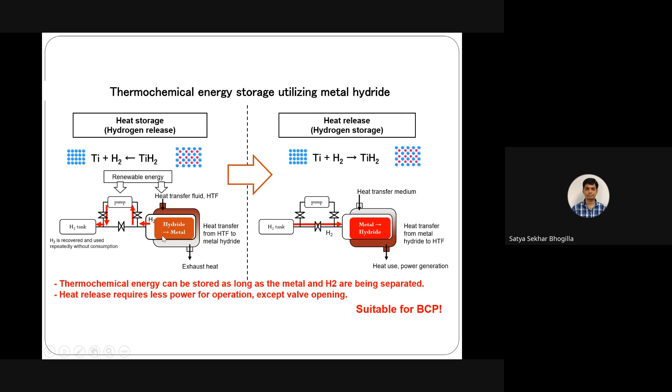And we also studied this energy storage by using solid oxide fuel cells. Same system, instead of PEM fuel cell, we have also studied the solid oxide fuel cell, how we can utilize this kind of system for stationary applications.

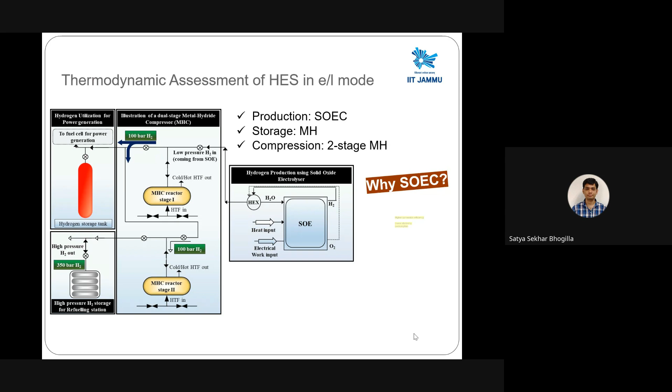As I said, compared to PEM, because of the low temperature output we are not able to use it, but in this case, if you have 700 or 1000 degrees centigrade, you can utilize that waste heat coming from the solid oxide fuel cell. You can supply it to the Rankine cycle, organic Rankine cycle, or Brayton cycle, and improve the efficiency, so the total efficiency increases much.

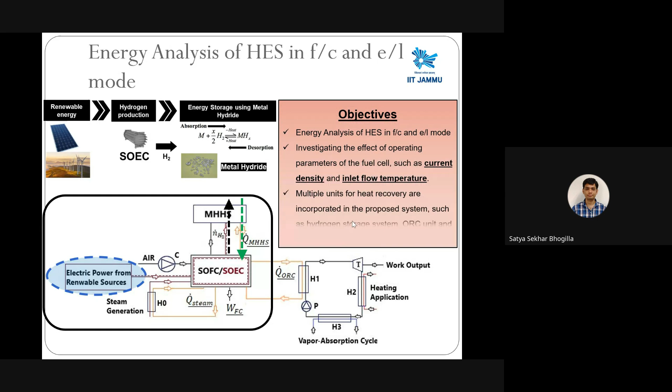Whatever waste heat is coming from the solid oxide fuel cell, either you can give it to the organic Rankine cycle, or you can give it to an absorption chiller, so that you can improve the total efficiency of the system.

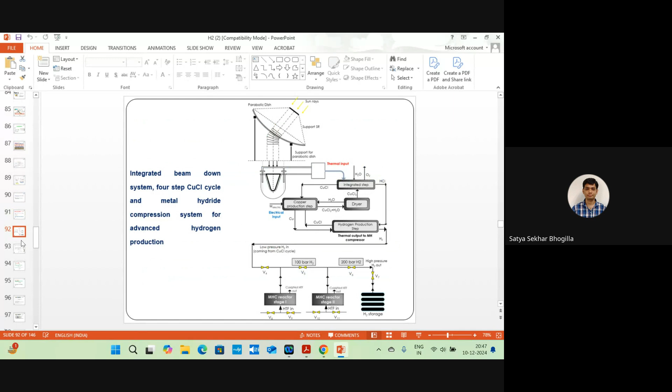So, last topic is, we have also designed one integrated beam down technology with copper chlorine cycle. Initially I explained how we can produce hydrogen through electrolysis. There is another one, thermochemical hydrogen production, where we use different cycles to produce hydrogen, but the input energy is in terms of thermal energy.

So you need some cycles, copper chlorine cycle requires at least 540 to 550 degrees centigrade, whereas sulfur iodine cycle requires 900 degrees centigrade. So how you will get this heat is a very important aspect to design this kind of hydrogen production system.

Here we have designed one integrated beam down system, where we can get very high temperature by using the solar dish. Then you are able to give this thermal input to the copper chlorine cycle, and you can produce the hydrogen.

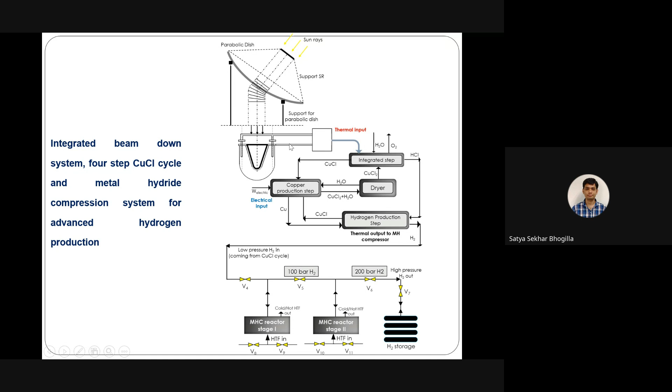That is the advantage of this kind of system. You can use solar energy, thermal energy, and produce hydrogen instead of solar PV plus electrolyzer. There you can produce hydrogen, but the other way, using solar thermal technology, produce heat at very high temperature, that will give to the thermochemical cycle, where you can produce hydrogen.

Yeah. So with this, I'm stopping. Thank you.